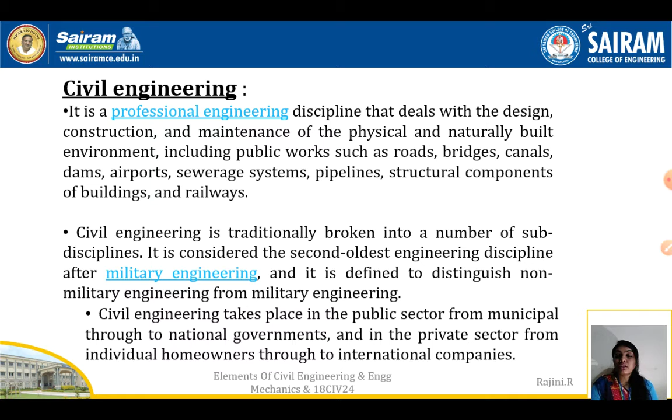Civil engineering is traditionally broken into a number of subdisciplines. As I told before, we have to see the different fields in civil engineering before going to solve the problems. It is considered the second oldest engineering discipline after military engineering, and it is defined to distinguish non-military engineering from military engineering. Civil engineering takes place in the public sector, from municipal through to national governments, and in the private sector, from individual homeowners through to international companies.

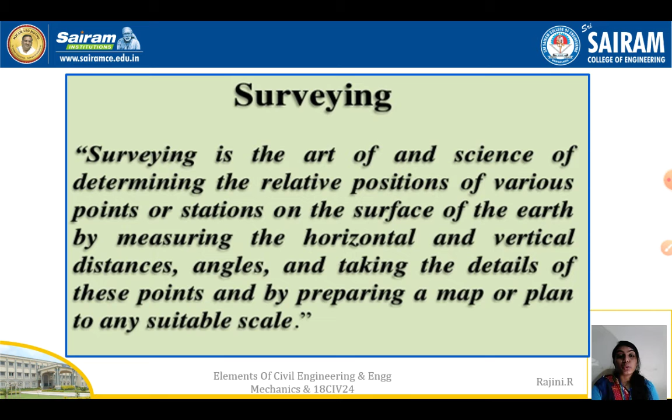Surveying is a science of map making. We are just making the maps for the construction of any structures. Before doing the plan, first we need to measure the land, horizontal, vertical, heights, everything.

Examples I have given here. Activity involved in collection of topographic features, as I said, the earth surface that we need to measure, of a location of future construction. Feasibility survey, alternative surveys and most suitable methods will be evolved, and helps in the environmental impact assessment.

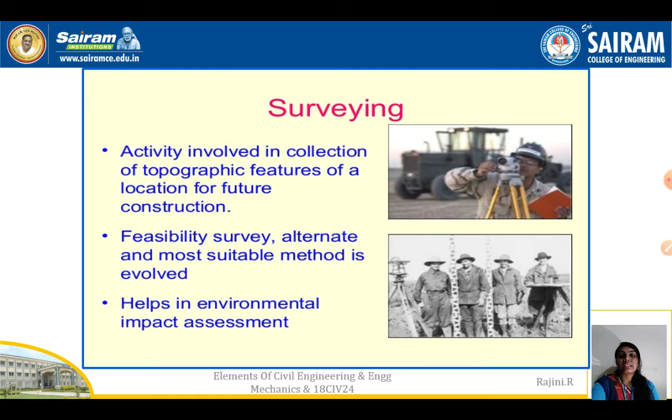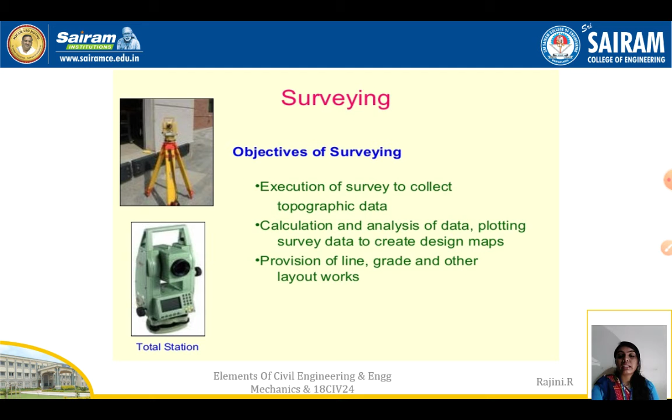Objectives. What are the main objectives of surveying? That is, execution of survey to collect the topographic data, calculation and analysis of data, plotting survey data, to create design maps, provision of line, grade, and other layout works. These are the main objectives we have in the surveying.

So the object of surveying is to prepare a map or a plan to show the relative positions of the objects on the surface of the earth. The map or plan is drawn for suitable scale, but the boundaries will be the districts, states, and the countries too. It is also included details of different engineering features such as roads, railways, dams, canals, airports, etc.

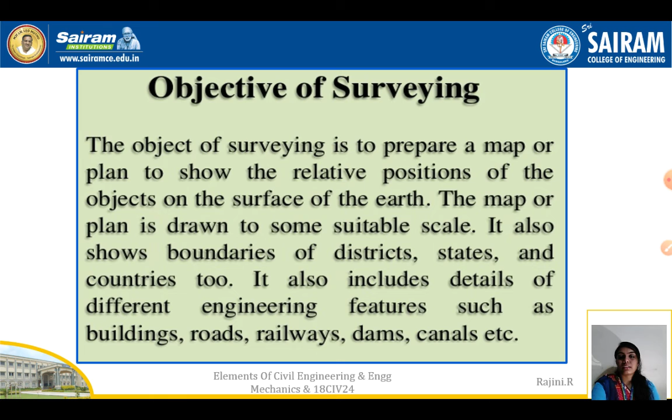What are the uses of surveying? The surveying may be used for the following purpose: to prepare a topographic map which shows the hills, valleys, rivers, villages, towns, etc., and to prepare the cadastral map which shows the boundaries of the fields, plots, houses, and other properties.

Surveying is not only used for the measuring of the horizontal or vertical heights, but it is also useful for plotting the boundaries of your plots, sites, houses, your properties. It's also used to prepare an engineering map which shows the position of engineering work such as buildings, roads, railways, dams, and canals, as I said before.

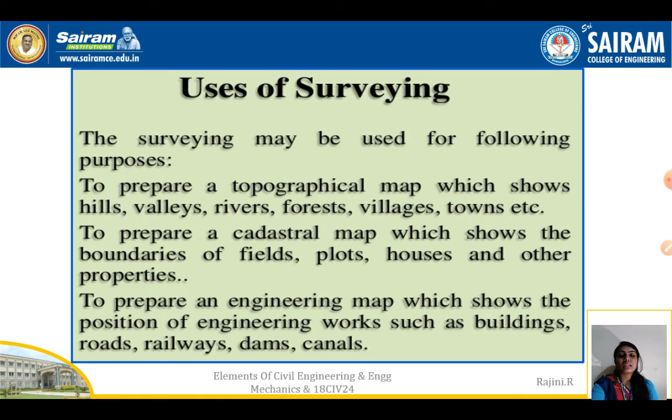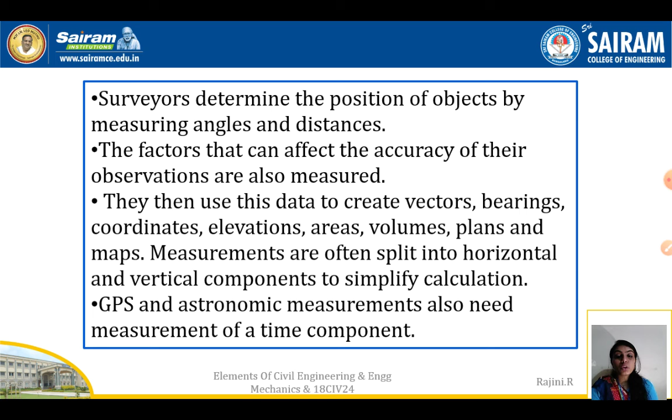Surveyors determine the position of objects by measuring angles and distances. The factors that can affect the accuracy of these observations are also measured. They then use this data to create vectors, bearings, coordinates, elevations, areas, volumes, plans, and maps. Measurements are often split into horizontal and vertical components to simplify the calculation. GPS and astronomic measurements also need a measurement of a time component.

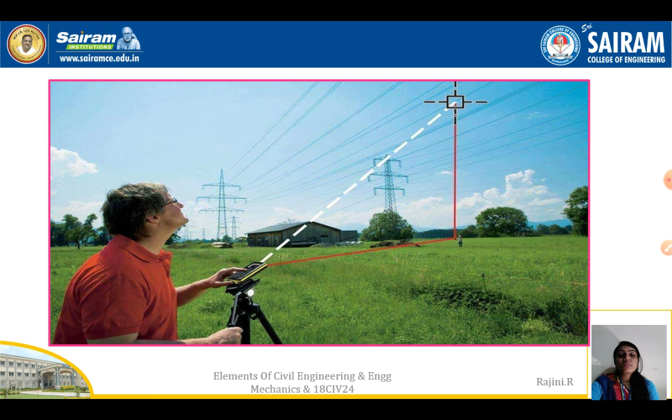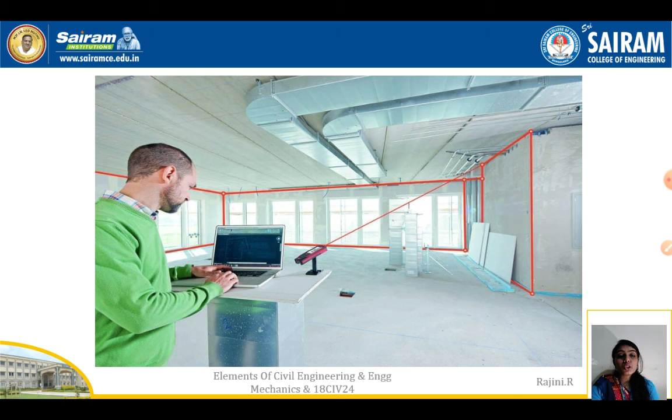Here you can see a person measuring the height of that pole. The same way here also you can see he is measuring width, I mean the horizontal measurement and the vertical measurement of the wall or a beam. Here you can see the distance of the wall or a room area.

Here also, the point from point A to point B, which we need the distance from point A - if you switch on the instrument, you will get the radiations to point B, and we can read that measurement in the instrument.

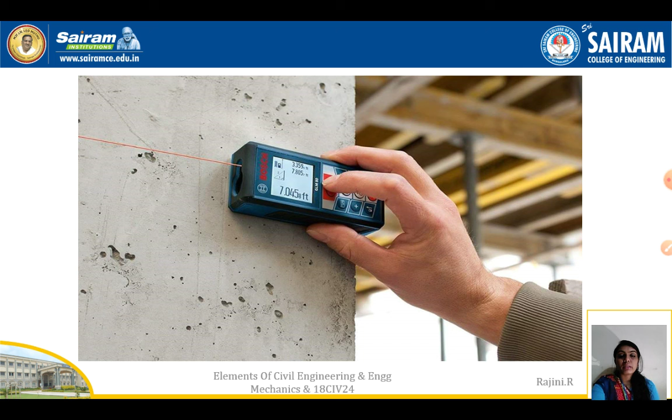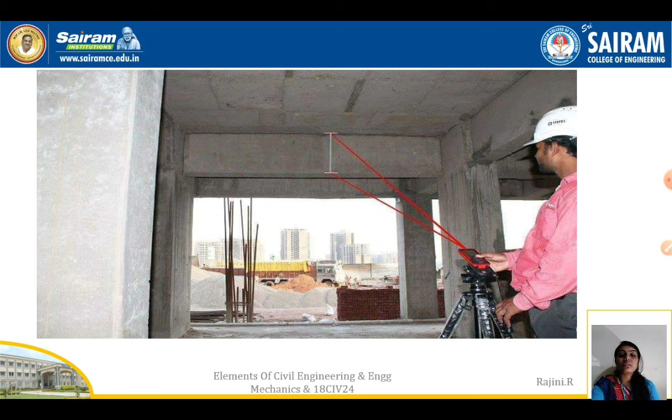Here also he is measuring the width of the beam, right? So width of the beam, standing in one place, and he is switching that machine, that is the distance meter. So the use of the distance meter is to measure the height and width of the beam, columns, any structure's height, walls' width, and horizontal and vertical components of the wall, etc.

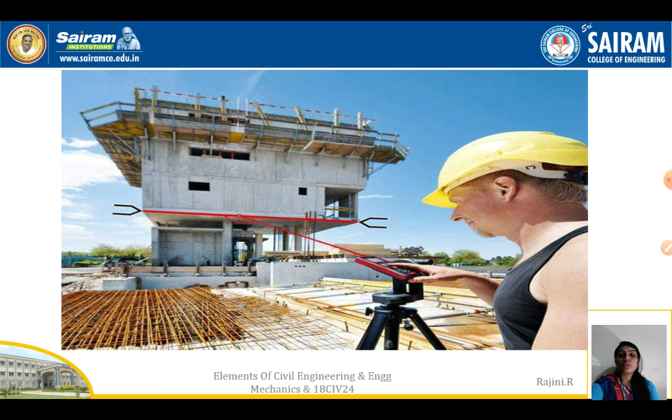Here also you can see he's measuring the distance from point A to point B without using any old materials, that is chain, tapes, etc.

So this is all about the surveying. We will go to the next discipline, one by one. We have nine different fields. We'll go to the next field now.